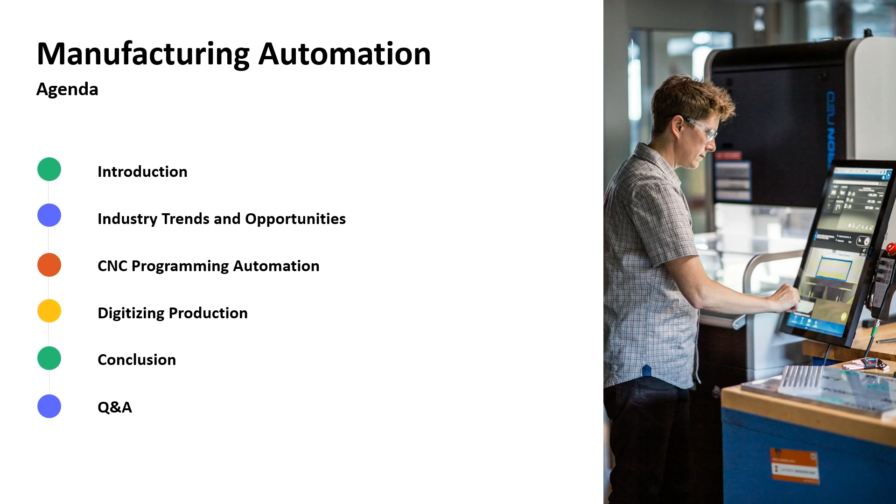So today, here's a quick run through. First I'm going to introduce Autodesk and go over some of the industry trends. I'll breeze through that part because it's a lot of repeat from what other companies have talked about in terms of trends they're seeing. Then I'm going to dive into two solutions. Autodesk has a portfolio of over 90 software solutions, not all of them design and manufacturing, but I'm going to talk about two today. One is called Autodesk Fusion, a design and make platform, and I'll specifically talk about some CNC programming automation. Then I'm going to talk about our MES system, which we touched on a little earlier with Bill's presentation, and talk about digitizing production. Finally, we'll do some Q&A.

A little bit about Autodesk, if you're not familiar. We're a technology company founded about 40 years ago. So who's heard of Autodesk? Great. Who's used Autodesk stuff? What have you used? Inventor, Fusion 360, Mechanical Desktop many years ago. Awesome. Anyone else? AutoCAD. Who's used AutoCAD? Raise your hand.

Basically everyone. So we still love AutoCAD, it's a huge part of who we are. We're also moving towards a new, cloud-connected platform business. So still supporting AutoCAD, still supporting Inventor, still supporting our flagship products across all our industries. But what I'm talking about today is really the direction we're putting a lot of our innovation into, which is a platform called Autodesk Fusion.

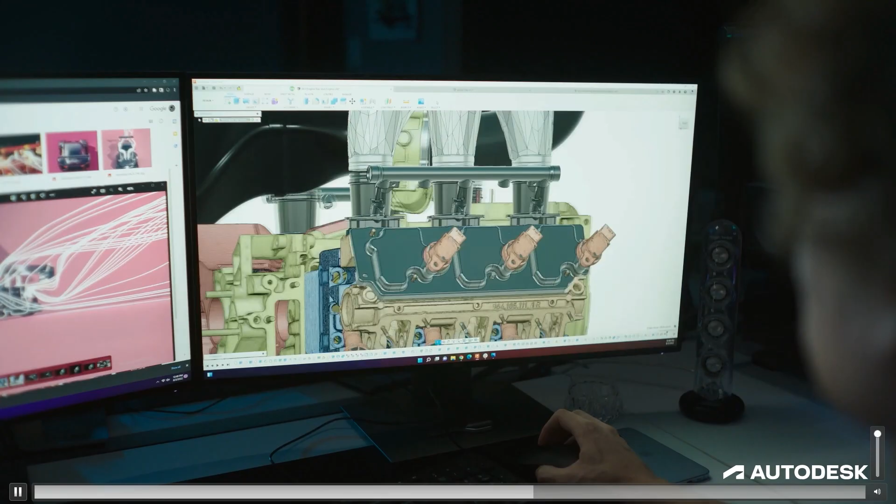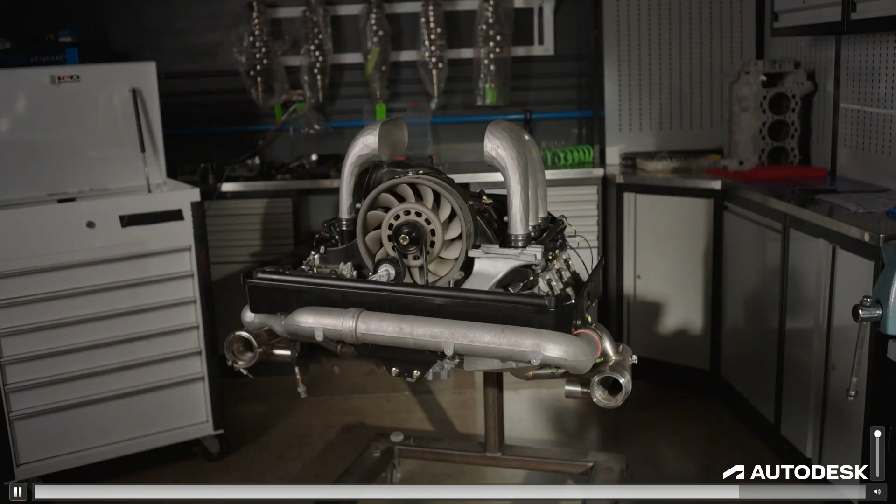So in a static market, incumbent suppliers are next to impossible to displace. If everything's going fine and you're just keeping the status quo, and a company has been using this product for years, they're not really going to change. You need a disruptor to change course, and many of your products might be that disruptor. So every now and then we experience a major event that changes the natural order of things, and those that can adapt the fastest become the new leaders. So we believe that right now is the time. It is an opportunity to reimagine possible and change to do things better.

So for manufacturers like BBI Racing, which was in this video, finding a way to control costs, maintain margins, manage supply chains, upskill people, and attract young talent means they're better positioned to win market share today and tomorrow. So when we say reimagine possible, we see this as the opportunity to take advantage of trends. One trend is smart products. This makes the machines around us more productive, and also creates opportunities as customer demand grows, product developers expand and supply chains onshore. One example of this is sensors that read off machines, sensor hardware that connects to robots or the FANUC controllers, this IoT system around our manufacturing floors.

Secondly, manufacturing processes are being increasingly digitized, which provides greater flexibility and efficiency in the tools that we're using. And third, cloud technologies are changing how we manage our supply chains and the manufacturing processes, helping deliver products on time, every time, right? This is where an MES system, ERP systems come into play.

Oh, I forgot to go around. Oops. Yep, I'm just gonna move a little faster here.

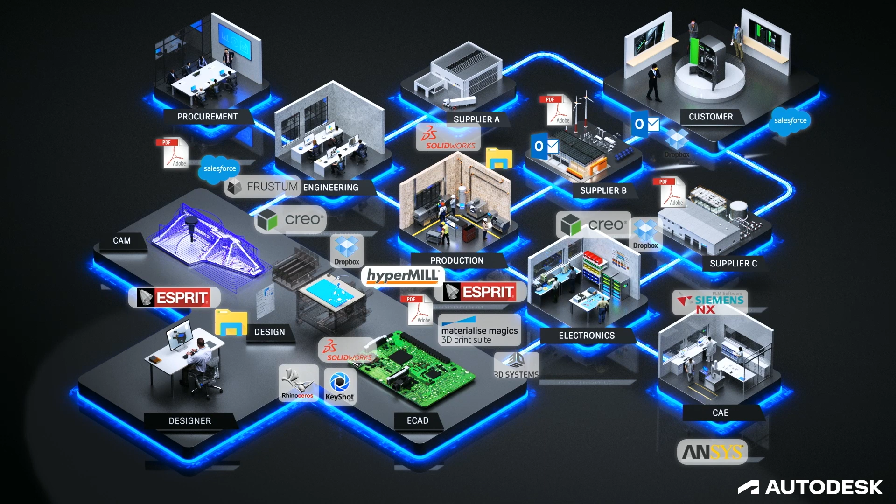So this is not to say we shouldn't all aim for tier 4 or whatever of digital maturity. We absolutely should. But we should be both realistic and practical in what we actually can achieve today, this year, in terms of increasing our business outcomes towards automation.

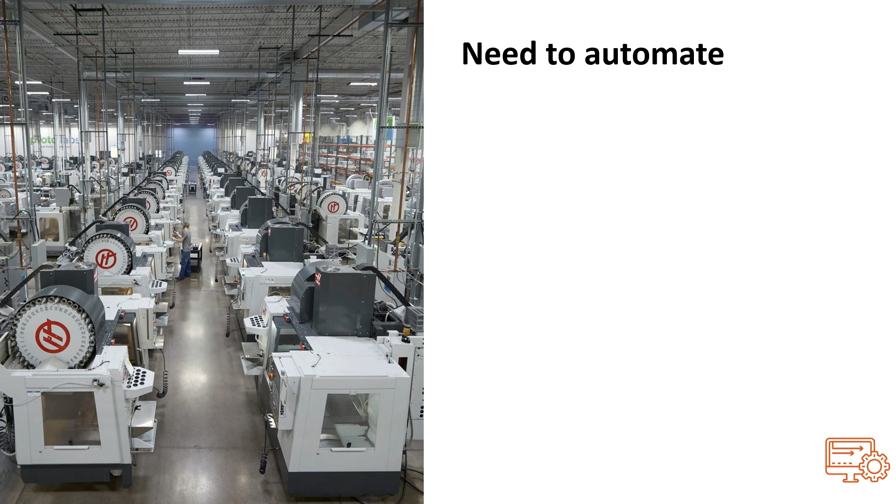So, as manufacturers, we need to address challenges and aspire to 4 key values. At Autodesk, we're really all about outcomes, right? Like, what are our customers getting? So we want them to create better products, win more business, improve operational efficiency, and enable increased innovation. And you all probably have your own unique challenges, right? No company is the same. But one commonality we see is the need to automate to speed up manufacturing processes and reduce delivery times. And that's why we're all here today.

Now, what do we mean by automated? When I'm talking about automated for this presentation, within the manufacturing industry, it comes in many forms, right? Assembly lines, industrial robots, we heard a lot about that today, to automated guided vehicles, right? But for this presentation, I'm focusing primarily on software. Autodesk does not build hardware products. And we're trying to help automate the processes for manufacturing. And the goal of that being reduce non-value added tasks, deliver repeatable and consistent workflows, improve quality, reduce human error, and result in more reliable products.

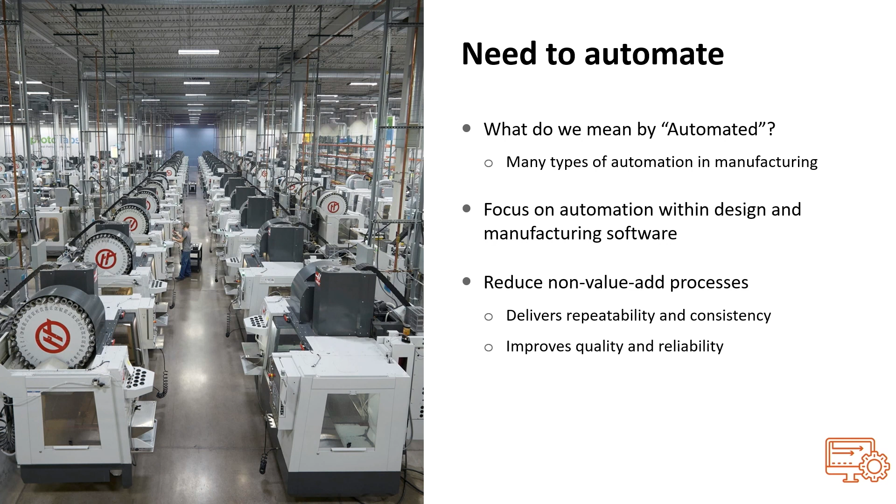So we're going to approach manufacturing from 3 levels. So first is the machine, right? Here we're talking about individual conveyors, gantries, mills, lathes, et cetera, on the shop floor. And we'll talk about automating setup, programming, and inspection tasks using a variety of machines. The second level is the operations of a factory or shop floor as a system, right? A system of people, a system of goods, all moving through space. And here we're concerned with increasing manufacturing throughput by optimizing processes around production management.

And the final, and that's this one. And the final level is supply chain. So securing the materials that you need for manufacturing without compromising quality. And here, this is part of an MES system, streamlining the management of inventory and suppliers.

All right, so let's start at the machine level. So in a recent survey by the Modern Machine Shop, more than 400 US-based manufacturing businesses were asked to review their achievements in 2022. So a number of interesting statistics stand out. First is 28 days. This is the average time taken to go from initial receipt of order to completing a project and delivering to the end customer.

80 minutes is the claimed average time spent setting up a machine in readiness for processing a new part. This includes fixturing, tooling, positioning, etc. 65%, this is a typical machine utilization across the year, meaning machines that are non-productive for 35% of the year, right? This is similar to some of the statistics.

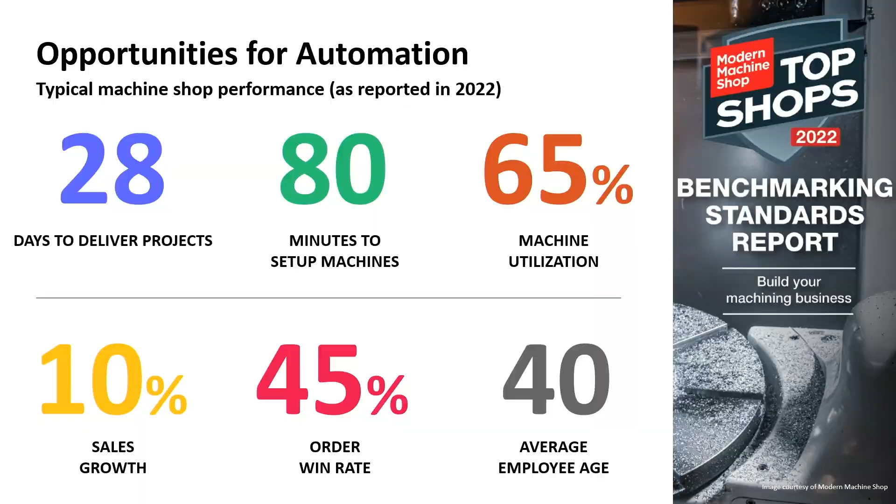That's incredible. That's survey data coming from that person. Yeah. When you actually measure that, it's even less, that's the 28%. Yeah, so as reported by people, they said it was 65% utilization. Clearly they were over-reporting. But interesting that they did over-report. That's some sort of psychological, maybe they didn't want to look as bad as it was.

10% is the typical business growth rate. Bigger would be better, right? 9% profit margin. 45% is the claimed typical order win rate. And 40 is the average age of employee in the manufacturing sector, with the average employee having 12 years of experience. It's interesting, there was a question much earlier about employees being sort of green recently, someone sitting back there.

And I was thinking about this number. 40 seemed lower than I thought it would be, to be honest. I'm curious, does anyone else have any reactions to that number or any numbers on this slide? Did you have something you wanted to say? No. I was a little surprised.

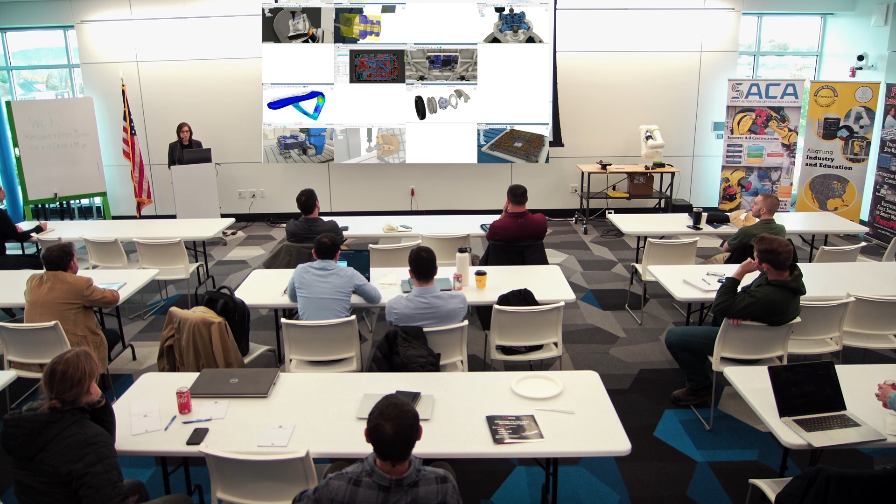So at this point, I want to introduce Fusion, which is our flagship cloud product for design and manufacturing. So it's not just a PLM system or PDM or MES or CAD or CAM. It doesn't just focus on milling or additive or fabrication. It's all of those things. It is packed with powerful tools to streamline product development and manufacturing, from initial product design to simulation to documentation. It provides a comprehensive toolkit for every piece of a product development cycle.

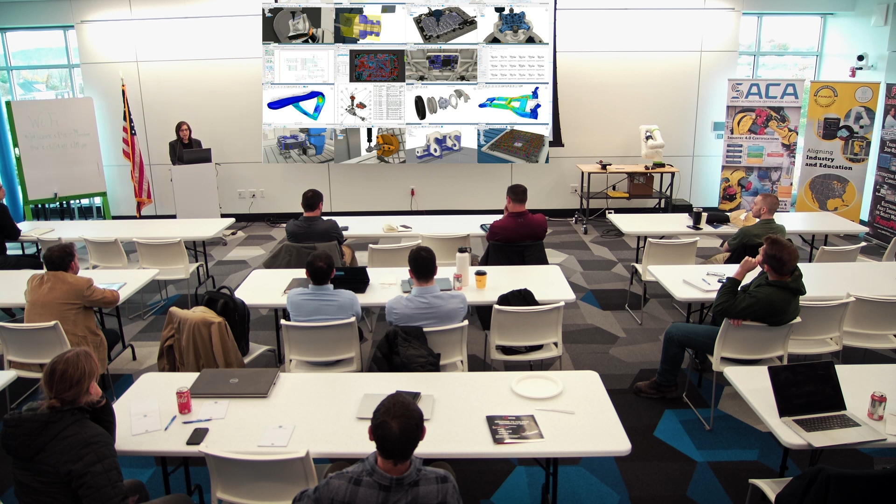And the part we're going to focus on today is the NC code generation and some of the automation tools around part manufacturing. So, I'm going to walk through some examples of some of the individual features. It's a little bit more technical, but I think there were some other technical things, so I think this is a good audience for some technical demos and features around it.

So I'm going to give 4 or so. These mostly are focused on CNC machining, which I think some folks in the room do, but we also have not shown a lot of features around, for example, nesting and fabrication for sheet metal and things like that, and also injection molding simulation. So not what I'm going to show today, but they're there. So the first is automating setup time. So on that slide I showed, 80 minutes was the reported average setup time for a part.

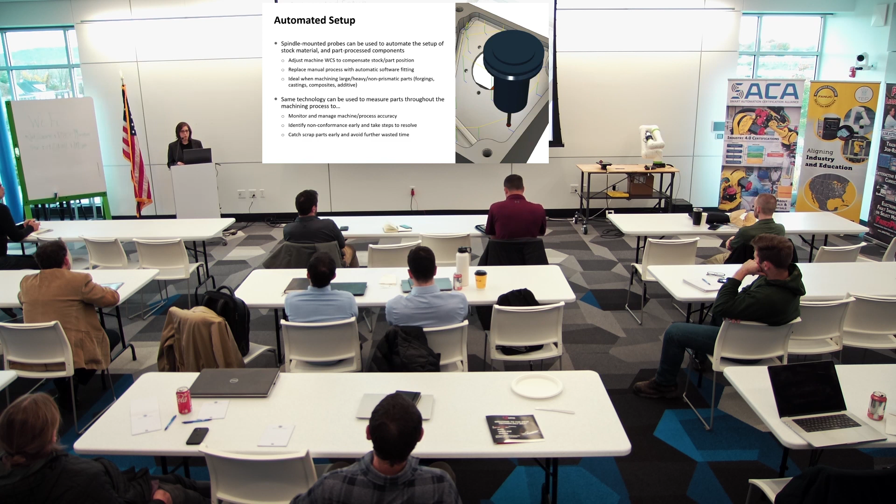So starting with setup, Fusion can automate this piece. So it includes workpiece coordinate system probing using spindle-mounted probes, and we can add surface inspection and part alignment capabilities to monitor the quality and performance of the entire CNC machining process. So basically, you can probe your part before you start, entirely automated, and then you can add probing cycles in the middle of your CNC program so that you're actually checking and monitoring the part before it's done.

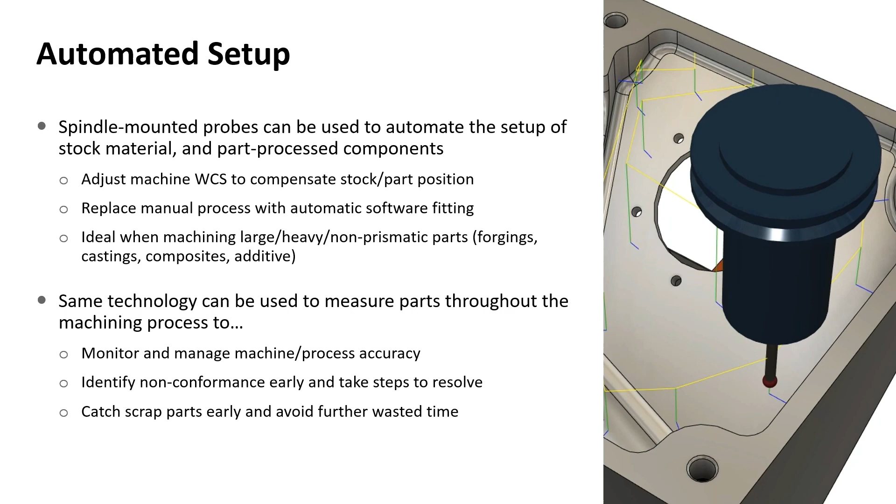So, for example, if you do it after the first operation or the second operation and it's very much out of alignment, maybe your fixture wasn't tight or something, you can realize that, scrap the part before you get 2 hours into the machining time. So all of that can be programmed. And here is a little video.

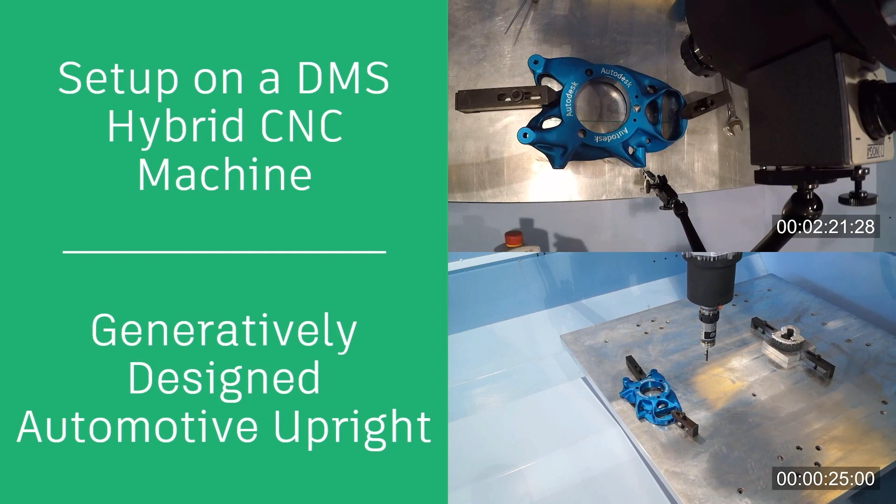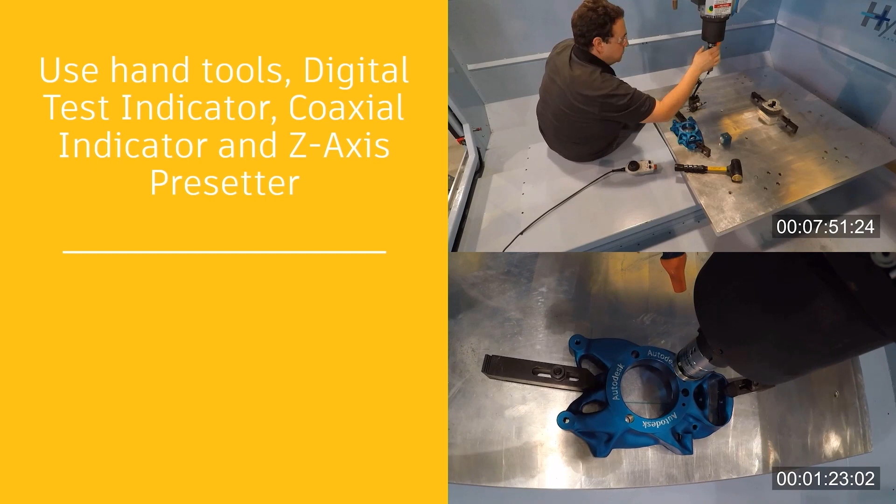So here we have a comparison between manual and automated sequences on the same part. So in the top video, you can see the time is actually moving a lot faster. But in both cases, it's the same part on the same machine. And by programming the setups offline and running them as quick, repeatable, and accurate NC programs, you can maximize profitability. You can use that time for other value-added tasks. And you're getting more accurate probing.

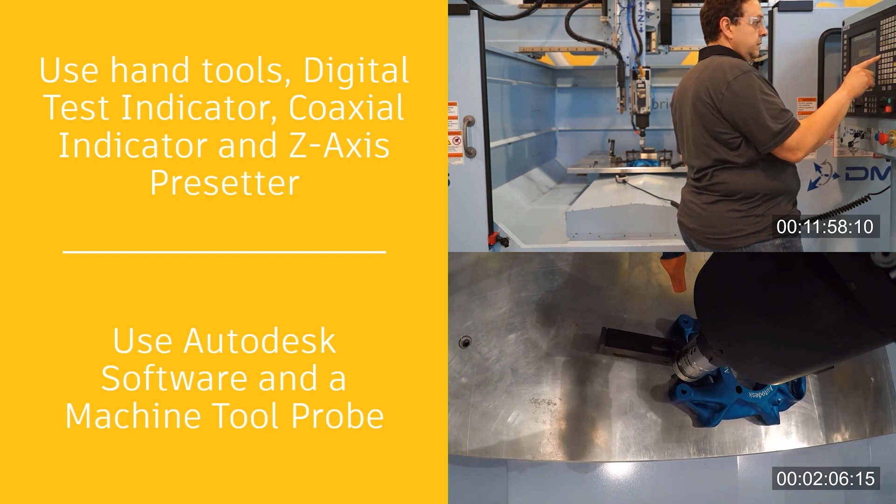So the automated setup took 2 minutes and 6 seconds, and the hand programming setup, and this video was done with an experienced CNC machinist, still took him 12 minutes.

So this is a pretty awesome feature I've actually used myself to program parts when I was an engineer. And this is using templates. So I'm going to see if this video will cover it. But the idea here is that you can create a template. You're basically doing similar operations for similar parts, right?

For this turning part, you're going to run some roughing operations, some finishing operations, some grooving operations. And that's a pretty templatized set of operations already. So you just create that list of operations in a file, right? And then you drop your part into that file. It finds the part, and it applies all those toolpaths to this part.

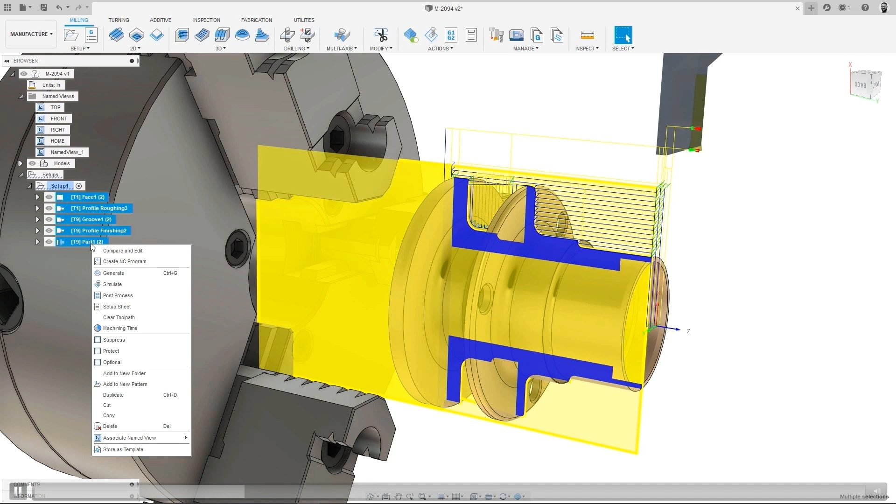And if you want to do it to a second part, you just drop that part in, and it does the same thing. It applies all of it. So what that allows you to do is not add the same toolpaths over and over again as you program multiple parts. It's just literally a drag and drop, and it automatically figures out what it's doing. And it does that by figuring out what to cut by subtracting the part from the stock. So it's totally automated. And it's very repeatable. It makes for more consistent parts.

It means you can get new employees up to speed doing more complex parts faster, right? If you have new programmers coming in and they're getting up to speed on the software, they're getting up to speed on what toolpaths to use. Here you have an experienced person creating a template for a part like this. They drop it in, and they can start cutting much faster.

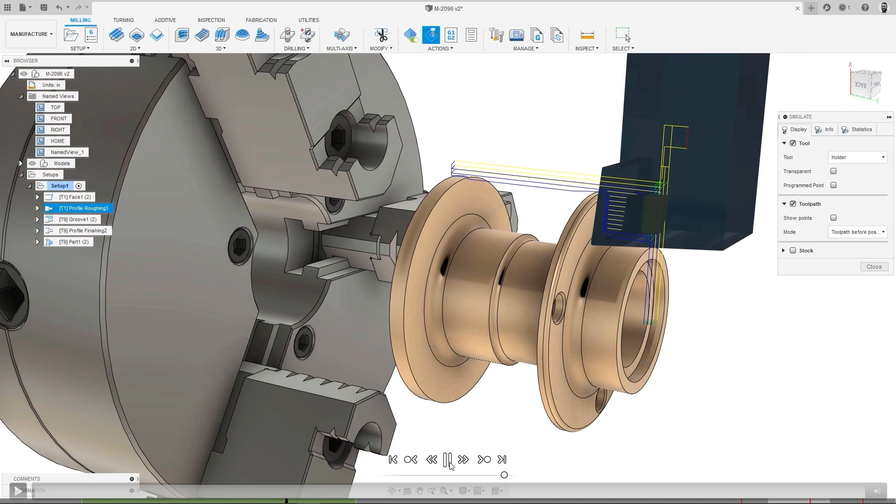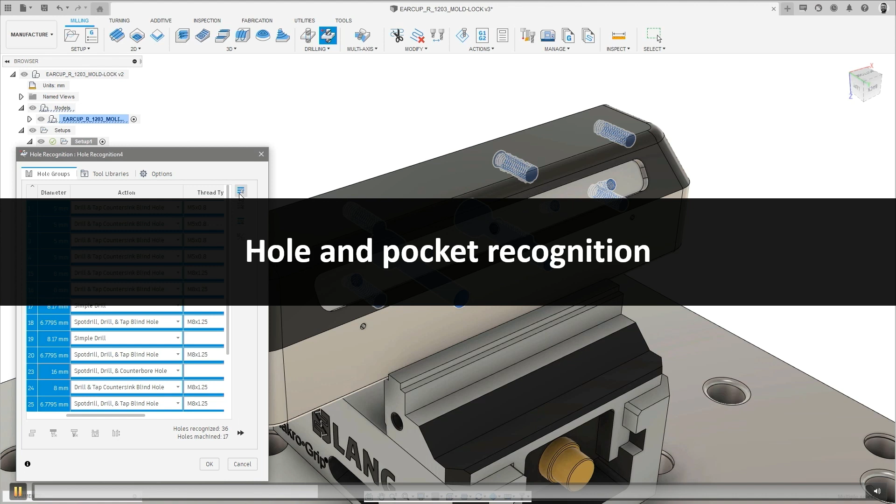The second one is around hole and pocket recognition. So when I was an engineer and I was prototyping on CNC machines, this is something that is pretty ubiquitous. I did it a lot. And every time you have to click on the holes and size the drill. So this automated tool, basically, you select the part, it finds all the holes in the part, and it finds exactly the sizes. It suggests tools for you to use for those holes, and it will do it.

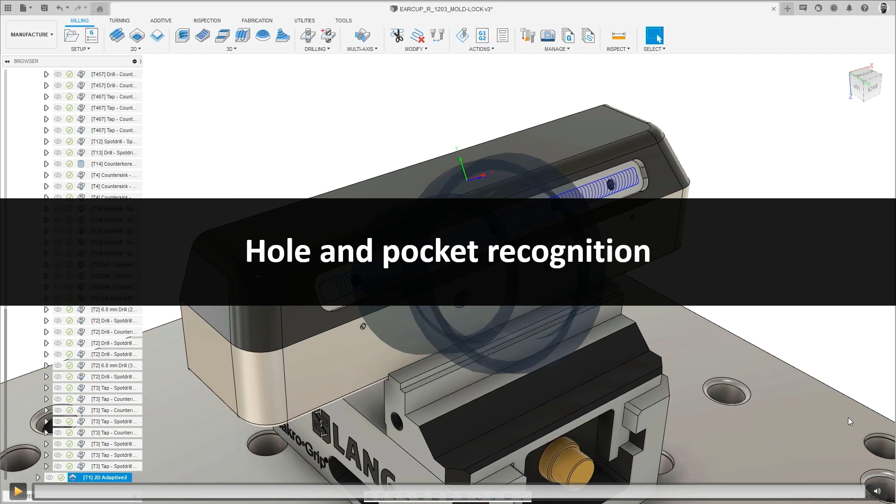You'll basically select a face that's normal to the vertical axis. It's going to find all the holes on that surface. So this works for models imported from other CAD systems. It recognizes holes using predefined configurable templates. So once it recognizes all the holes, you can say, okay, do you want to use a template?

And let's say you have a template for reaming, or for spot drilling, or for tapping, right? You just say, okay, I'm going to use this tapping template, and it will apply that to all the holes or some portion of the holes. So it really reduces what was a quite manual process into a couple clicks.

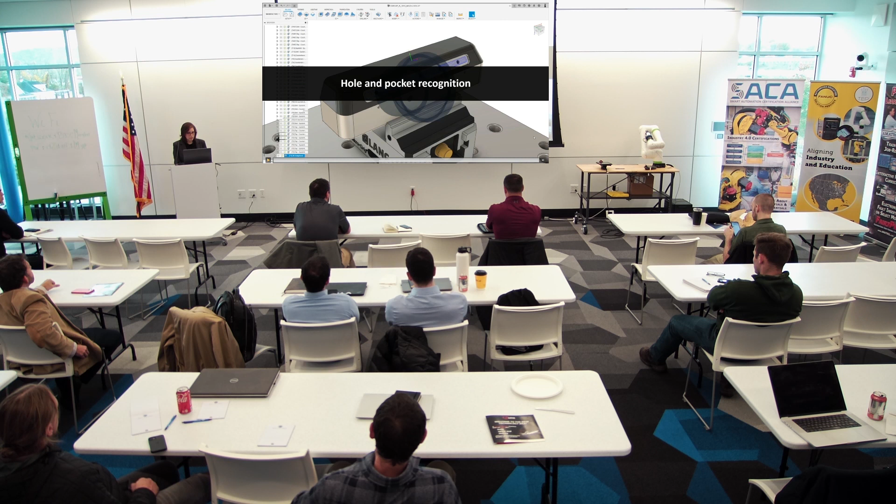Did I play that? I think I did.

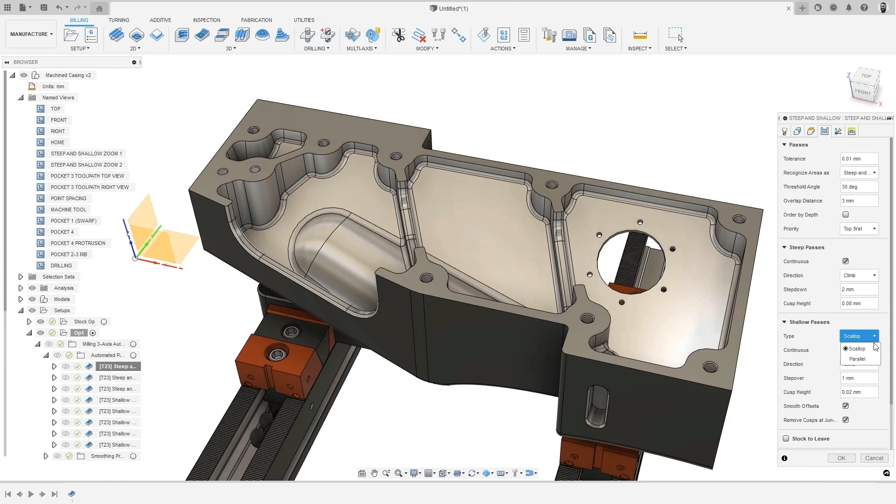Yeah. So then we have automated whole part machining. So I talked a little bit about this, but this is a huge benefit. I wish I had known about this when I was machining parts. So we have a lot of strategies in this category, but basically they eliminate the need to select edges, faces, features, etc. to machine. You just select the part, and it calculates what to cut. There's roughing strategies for this. There's finishing strategies for this.

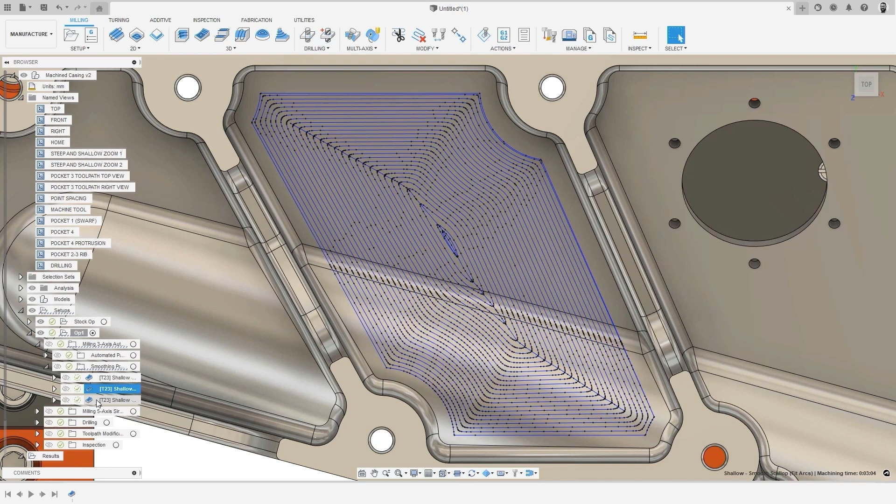Probably the most automated one is this toolpath called Steep and Shallow, and it works for shallow pockets or shallow surfaces and really deep surfaces, or steep surfaces. So typically you'd have different toolpaths for milling flats versus milling the edges of pockets. And this allows you to use one toolpath for all of it. You just basically have a threshold of like, above a 30 degree angle, you use this toolpath. Below, you use this toolpath, and it's still one toolpath, but it's pulling in the code from these other strategies all into one. It's pretty awesome.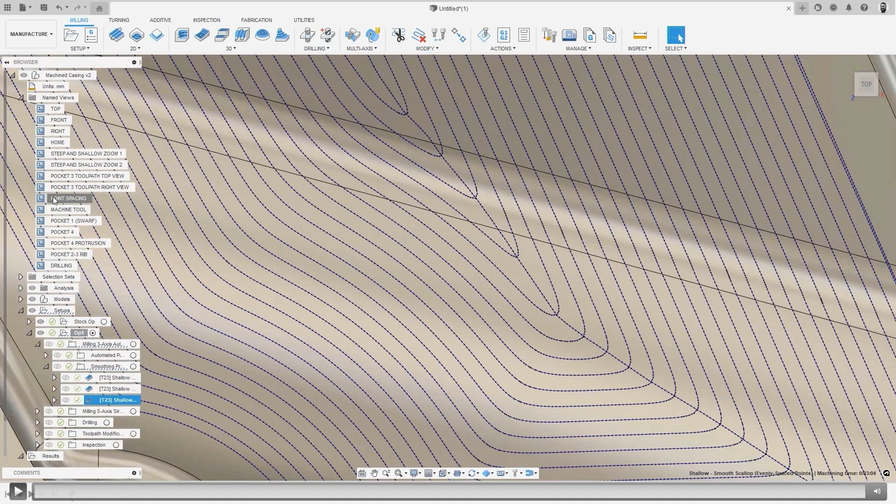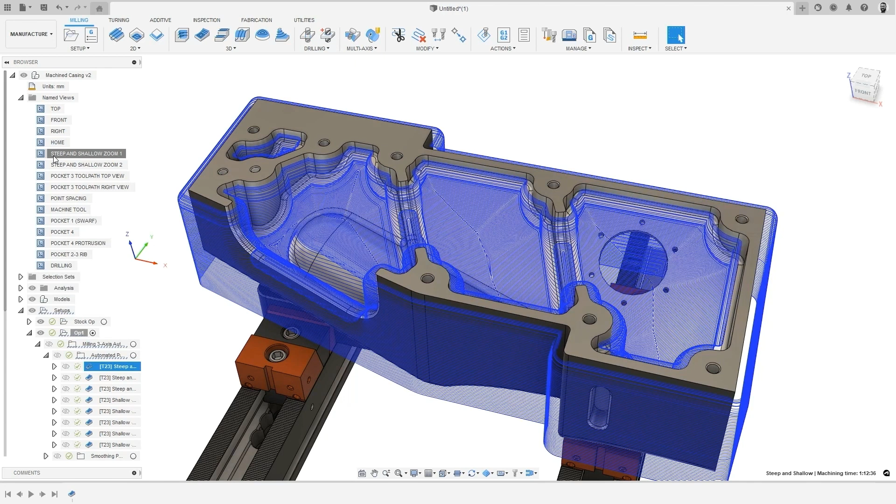With a few tweaks, you're basically having the machining and the programming done in a fraction of the time it would take. And then the last thing is collision avoidance. So this is probably most useful for multi-axis machines, but still fairly useful if you have complex fixtures, or you're thinking about hitting the limits of your table of the machine.

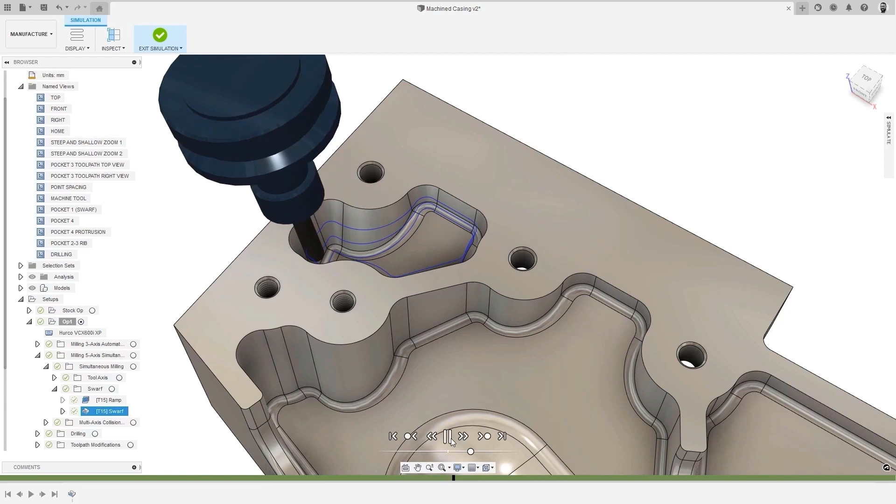So it can program simultaneous multi-axis operations. You can put the machine in and have it detect collision and figure out how to tilt the part, not just to optimize the toolpath, but also to eliminate those collisions. So pretty sweet. This has been a big area of focus for us, not just building world-class CAM software, but building in these automations so that we can have the best toolpaths done much quicker.

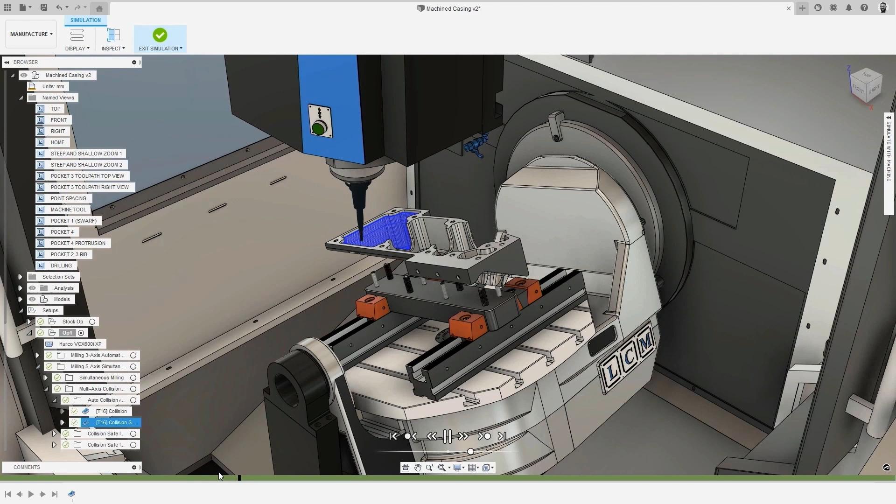And all these features work on a platform that is designed to have design and manufacturing converge. We use a single manufacturing data model. So anytime you're making a change, that's available to all stakeholders instantly. For folks who've used Fusion, it's a cloud-based platform. So if I change a toolpath and then I save it, it automatically saves. It'll be available to folks viewing that code instantly.

So it's super quick. If you're going from programmers to operators, that's almost an instantaneous connection. They can leave comments on the file. They can suggest edits. You can have multiple viewing levels, so you can have read only, and store things on a common platform. It's pretty powerful. So now that we've covered that, any questions about automated programming?

Okay. I haven't heard you say CAM. Yeah, I haven't heard you use the word. Oh, I used it when I was introducing Fusion, I think. But yeah, it's CAM. I'm not avoiding CAM. Okay.

So I'm going to move on to talk about digitization at the factory floor and supply chain levels. I'm going to cover mostly digitization of the factory floor. Supply chain is a small piece of it that I'll talk about at the end. So there's no doubt that managing a manufacturing or production facility is difficult, right? Balancing production and profitability goals with customer expectations is challenging. And we find that our customers are constantly faced with obstacles that can impede their path to being successful.

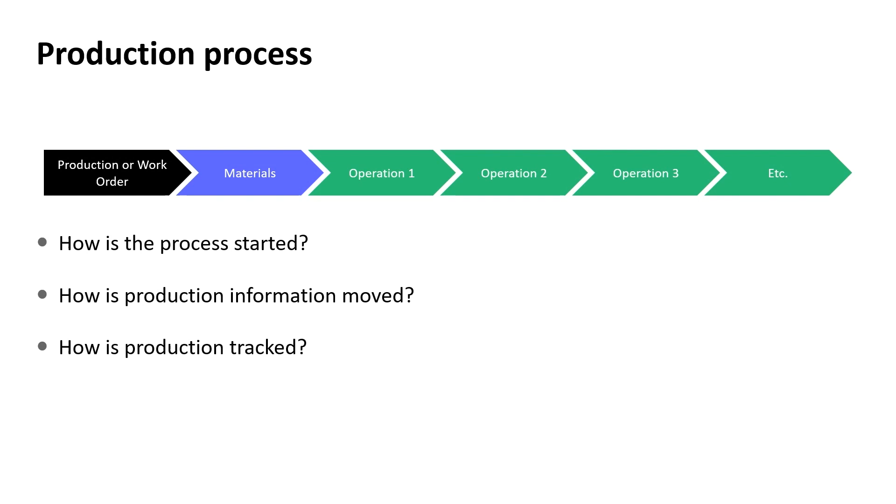And the typical production workflow looks like this. The most common way of managing information on any production floor is typically the paper traveler. You receive a client order, data is input in Excel: the order code, the products produced, how many, when they are due. This document is then printed out, given to a supervisor to start production. It follows the production flow along with the manufacturing materials. Each operation is recorded by operators on the shop floor and then returned to the back office team for manual data entry once that step is completed. We see this all the time.

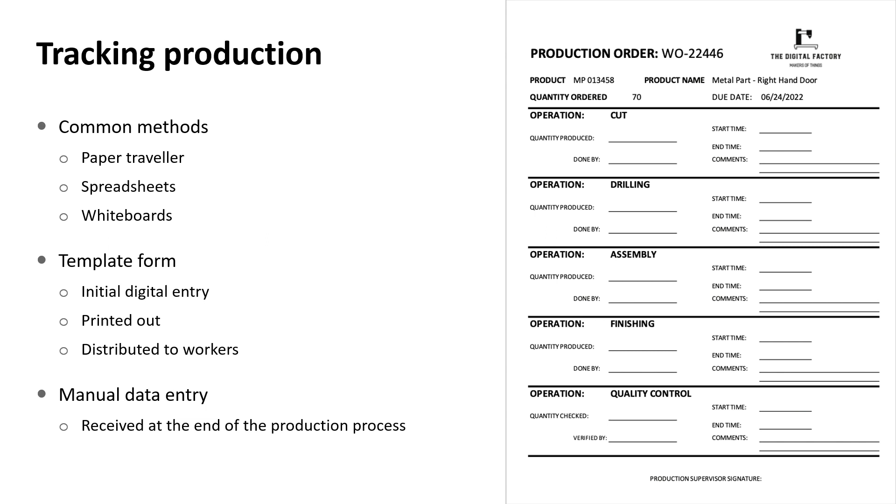So going back to our workflow, we can see that the paper traveler moves the production information along with each stage. Sometimes it's literally on the order, under the order. So as it travels, information is written down, timestamps are recorded, it tells us when each stage is complete. And then when the whole job is completed, the package is returned with the production information filled out, ready for manual data entry.

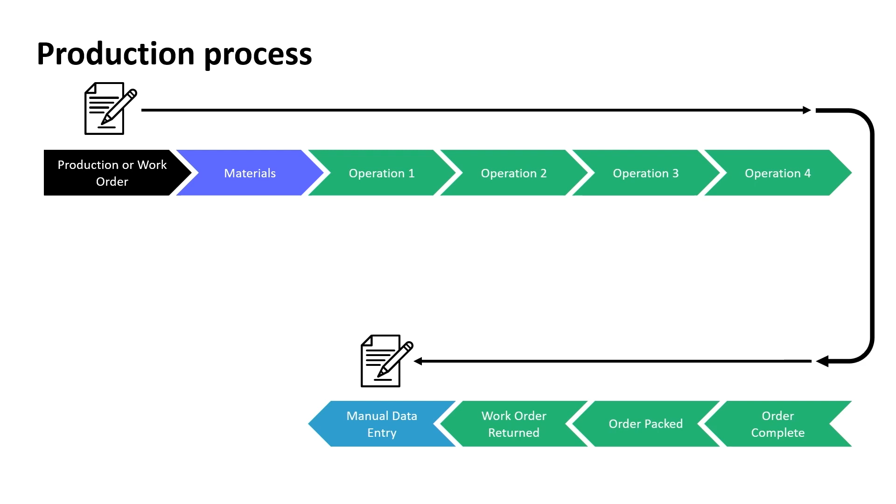There are several issues with this, right? We know that. First of all, you're relying on a person to manage the initiation of this process. You can't just say, okay, work orders in the system, start.

There's this whole printing, figuring out, making sure all the numbers are right in the sheet, then relying on that person to go physically take it down to the shop floor, which for small businesses might be literally right outside the office, but for larger businesses might be a different location entirely. Might be down the road. Maybe those people are connected, maybe they're not. Maybe they need to email it.

Things get lost, right? So operators, and the other issue is that operators are inconsistent with how they record their work. Data can be difficult to read. Things can be spilled on it, like just simple stuff like that.

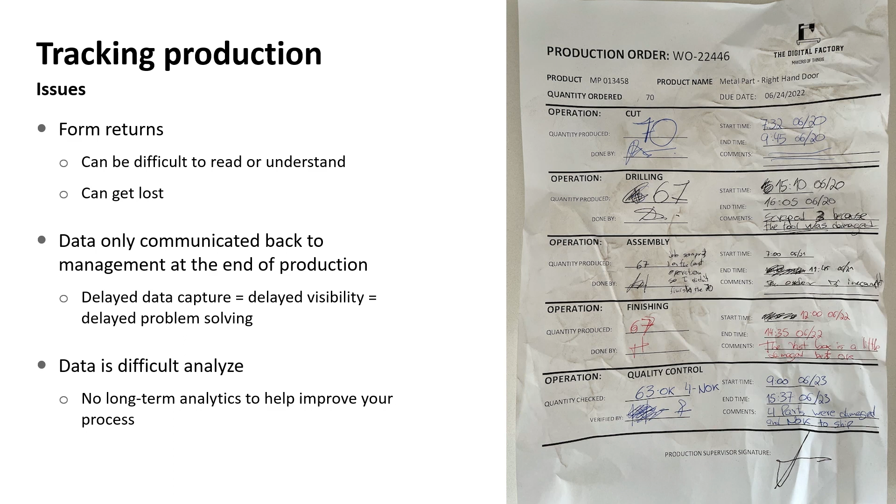And in real time, the production manager will need to physically traverse the shop floor to understand their status. Our customers will get a call, hey, what's the status on my order that I put in 3 weeks ago? And the person answering might say, I don't know, I have to check with our production manager. They have to go track them down. They have to go find the sheet. They have to go find out who's working on it at that time, right?

No real-time visibility. This can be challenging if you want to look at how has our performance been the last 2 weeks? How's our throughput been? How many jobs have we completed?

And even if the traveler is filled out perfectly, we still have lots of missing information, right? Things like inventory, operational availability, uptime, downtime, supply chain management, quality management.

So at the very beginning, we might have the right material in stock, but maybe we made some errors in the machining process, and now we're out of stock. Where is that being recorded? How is that being connected to the production process, for example?

And what about operational availability? What are the machines currently doing? Are they down? Do we know why they're down? Are they running at capacity?

What about the workers, right? A huge piece of this is the workers. Are they available? Are they working on their jobs? So one person asked the question earlier about how do we track worker productivity? Like, how do we know which of our employees are working at 110% of their expected capacity and which ones aren't?

That's also important. You want to make sure that if you have workers that are struggling and they might not self-report it, you want to be able to say, okay, maybe you need help with this, maybe this is an opportunity for upskilling, et cetera. Being able to identify those gaps is pretty important to retaining workforce and retaining skilled workforce.

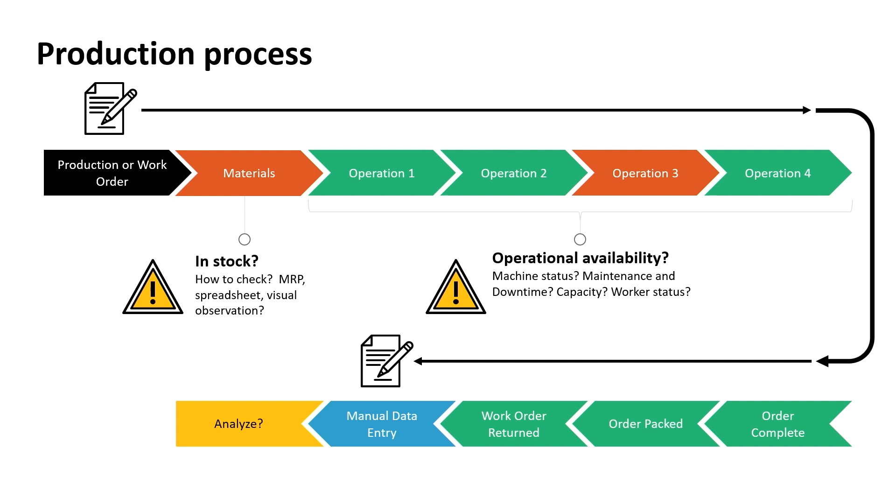If this doesn't get done, maybe there's accountability for it, maybe there's not, but if it doesn't get done, there's no data on it. And even if it does get done, there's an opportunity cost in the timeliness of it, right? We need to know what's happening on the production floor in real time. So using traditional methods, when information is required mid-process, someone has to find the person.

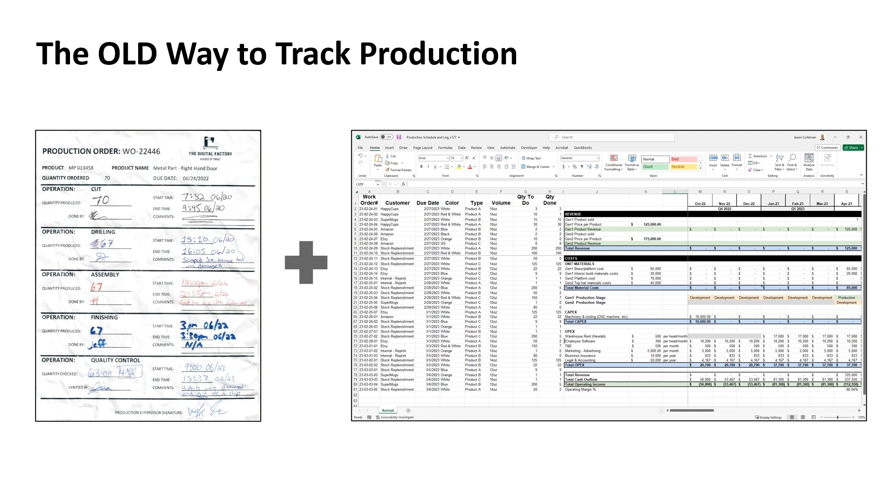But there is another way of tracking production, right? We've seen this a little bit, which is Excel, or less frequently Airtable, or just homegrown table-based systems. This is digitized, I guess, in the purest definition, but it lives in isolation. It's unstructured. It maybe was built by someone 20 years ago, and it doesn't really offer a lot of intelligence or visibility. It's just a recording device, basically.

We found that, of course, there's paper, there's spreadsheets, there's whiteboard systems to track their processing. These all have high costs. They don't provide information, they don't enable manufacturers to be on top of their processes, and they don't do a good job of achieving business outcomes at all. Deadlines are missed, increased waste and scrap, reduced quality.

So there's a better way, and one of our products, which is called ProdSmart, which is an MES system - I'll go into detail about what that actually means - primarily aims at digitizing production processes, giving key analytics and intelligence to make better business decisions.

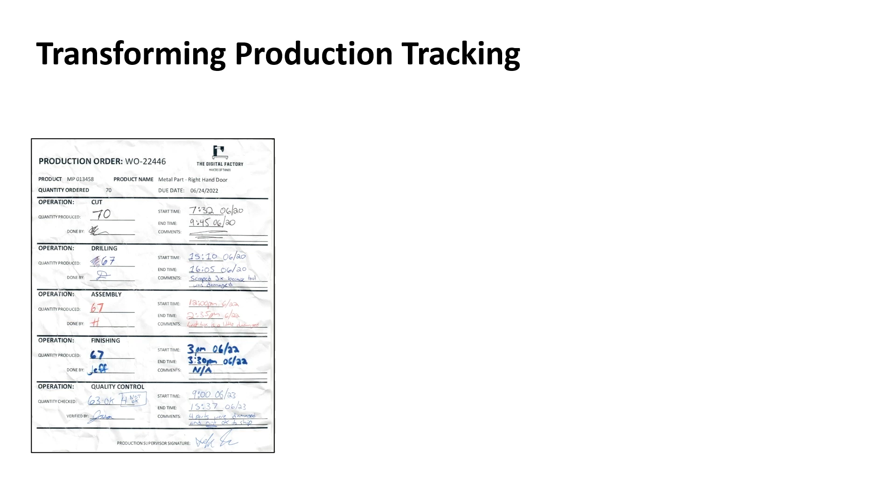So one differentiating feature of ProdSmart compared to MachineMetrics is that we don't currently have connectivity to the machines themselves. All of this is worker initiated. It's not recorded by typing, it's all a system of scans.

The way this works is it's an app. It's cloud-based, similar, but it's more focused on the worker and the user versus the machine. So, of course, we track machine uptime and downtime, and that's based on scanning in and out. A worker gets to a station, they scan in, then when they're done, they scan out, and we take all that data, and that's how we calculate uptime and downtime. It also gives us really detailed analytics on each worker themselves. So the basis of the platform is the users. That's a pretty big difference.

I'll talk about the benefits of this system and some more stuff after, but first I'm just going to walk through the capabilities.

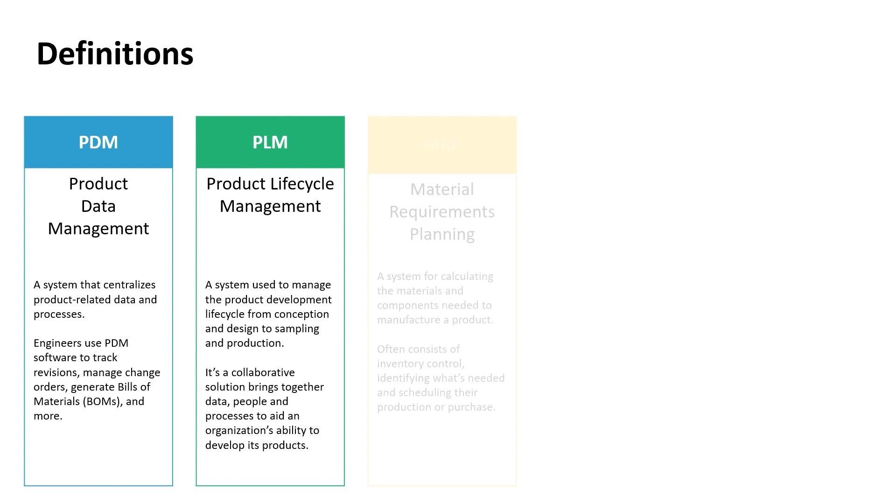So the definitions are, and hopefully this is helpful in this broader conversation: we talk about PDM, PLM, MRP, ERP, and MES. PDM is product data management, and that's a system that centralizes product-related data and processes. It's really for engineers to track revisions, manage change orders, generate bills of material, and more.

Oops, I forgot to do the last one. It's mainly on the design side, although I have seen some customers use PDM systems for some of the facilities management stuff, like keeping track of drawings, building plans, machine data sheets and things like that. PLM is product lifecycle management.

This is a system used to manage the product lifecycle from conception to sampling to production. It's a collaborative solution that brings together data, people, processes, all to aid an organization's ability to develop products. So think of it: if PDM is just around the data management or the file management, PLM is around all of the process management that surrounds the data management.

So, okay, you have a change order. What is the flow for that change order? Who does it go to? Who approves it? All of that is captured within the PLM system, plus more. MRP is material requirements planning, a system for calculating the materials and components needed. It often consists of inventory control, scheduling production, purchase orders, etc.

ERP is a very big one. It stands for Enterprise Resource Planning, and these are typically huge, expensive systems. They're very comprehensive, and I'll show what they typically include. But they consolidate all aspects of a business, including customer relationship management, or CRM - so, for example, Salesforce is CRM - purchasing and accounts, human resources, material requirements planning, supply chain management, and a lot more.

And last but not least, there's MES, Manufacturing Execution System. This monitors, tracks, and documents and controls the process of manufacturing goods from raw materials to finished products, and uses data to provide information on production. So it's really specific, typically, to production.

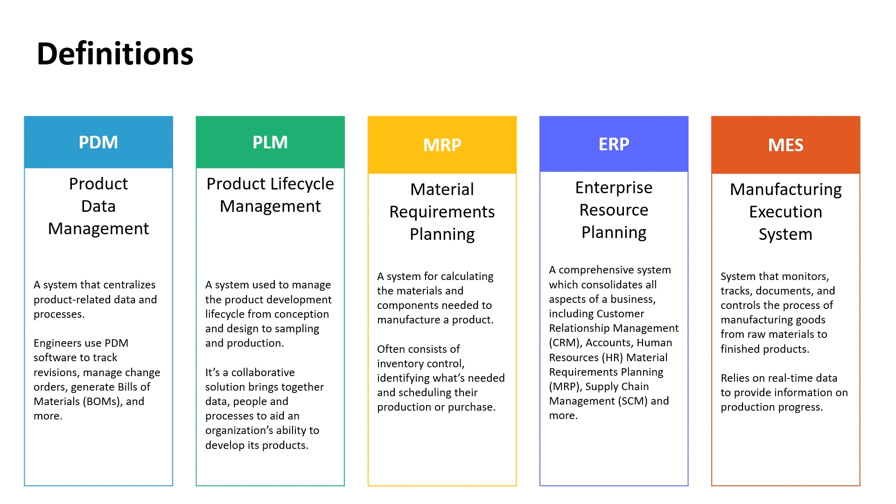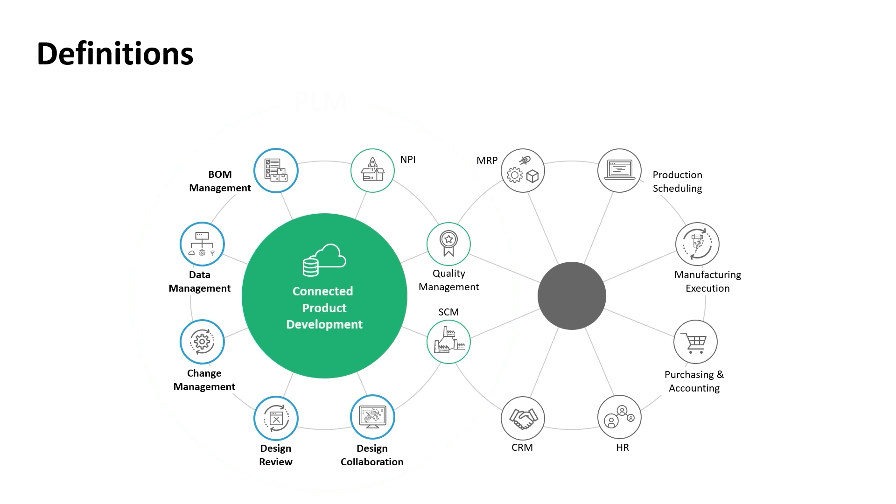So this is what it looks like visualized. Going back to the elements diagram, this left side is really on the design side. So we see things like data management, BOM management, NPI which is new product introduction, design collaboration, design review - this is all PLM. PDM is a small portion of those; PDM would include things like design collaboration, design review, BOM. But PLM is really the system around it that involves all of those processes together, and that's on the design side.

And then we see on the manufacturing side, we have MRP - that's just one piece that I talked about. And then it could also include elements such as production scheduling and material purchasing, and all of that is typically within an ERP. So ERPs are huge.

They typically are not great solutions for very small businesses because they're expensive, and they consolidate a lot of things that in a small business might only be one person doing it. It's not like a whole department or anything.

But what MES systems do is take a piece of ERP that's really only around production, and they do it well, focusing on that production piece. The primary functions are to manage manufacturing execution, production scheduling, manage materials, and monitor quality. So this is where we'll focus for our solution, although we do have a comprehensive solution for PLM and PDM, which is on the other side of the diagram.

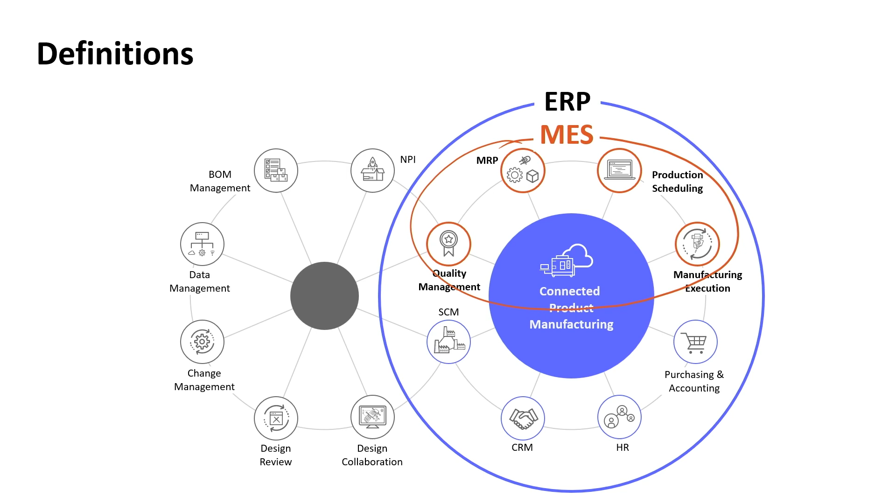When it comes to manufacturing software solutions, all of those different acronyms become an alphabet soup very quickly. Those are used to digitize paper. They tend to work better for larger organizations, built for companies with large budgets and dedicated IT staffs and integrators to figure out how all the systems work together. If you have an ERP system, for example, you need to put a bunch of stuff in one bucket — you might have a CRM, a change management system, an HR system — and for that to all integrate together is quite a big task. Typically, it doesn't get you a lot of immediate benefit, and it takes a long time to implement.

And even MES systems or solutions that are pieces of that, if they're built for larger organizations, they can take a lot of time, and of course they're quite expensive. But we see from our research that it takes 6 to 18 months to implement a typical enterprise-level MES solution.

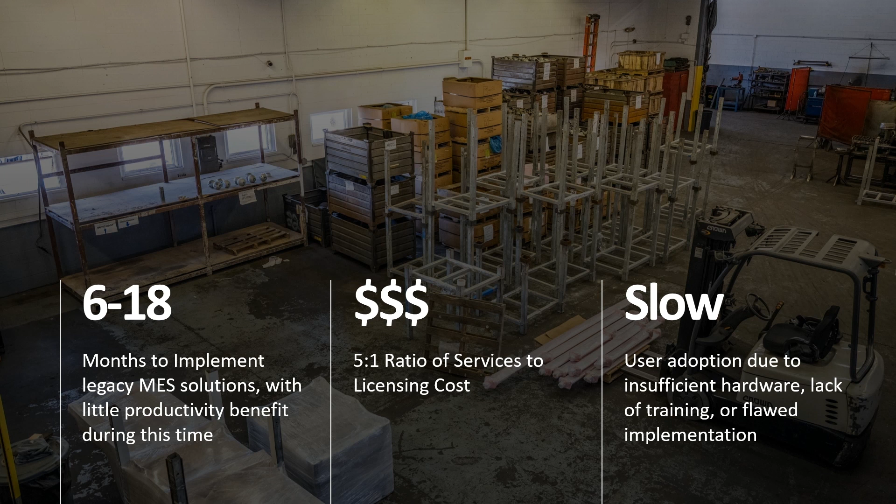So with ProdSmart, what we're seeing and hearing from our customers who adopt is that it's really fast — they can get up to speed in a matter of weeks. We've seen 2 weeks from purchase to full implementation. We're also pretty affordable — it's a scaled pricing model based on the number of users, but for our mid-tier size, it's less than $1,000 per user.

And it's efficient — easy adoption by management. You get dashboards, you get data analytics instantly with a modern digital interface and device independence that goes on an app. So I'll play this quick video.

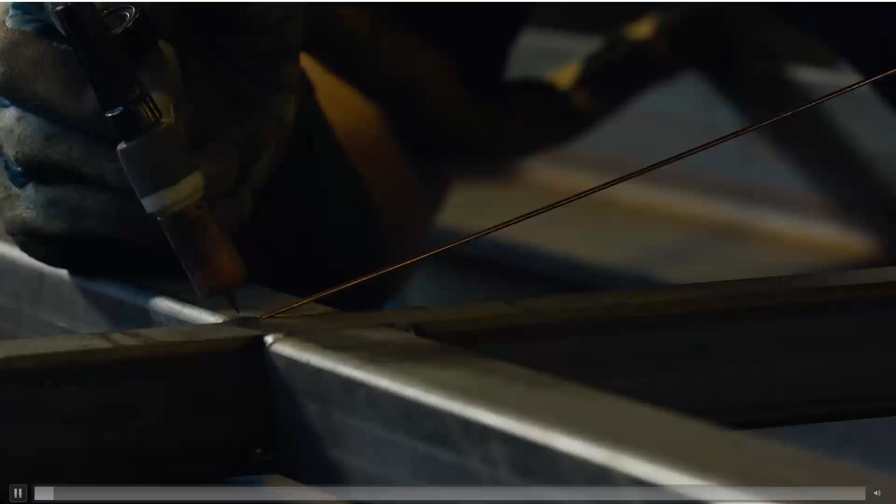Operating a production facility can be complicated, with a constant need to monitor everything from raw materials through to finished goods. To help address the challenges, production managers look to manufacturing execution systems, or MES, to track their production processes. But often these can be expensive to set up, painful to integrate, and under-deliver on addressing their true needs.

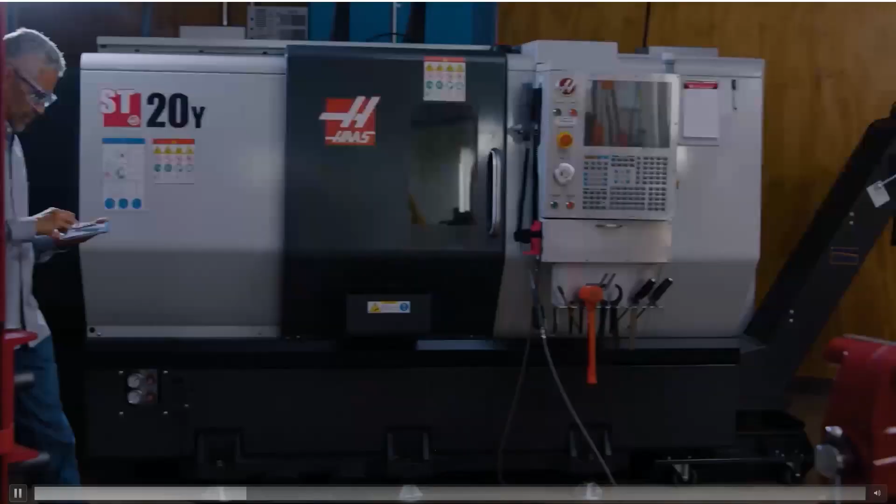Autodesk ProdSmart is different. ProdSmart is a go-anywhere, use-anywhere, cloud-connected MES and light enterprise resource planning system, which capitalizes on the use of web browsers and mobile devices for operation. This minimizes the IT overhead needed to get you up and running sooner and gives you the flexibility to start managing your production data today and adapt to your business as it grows.

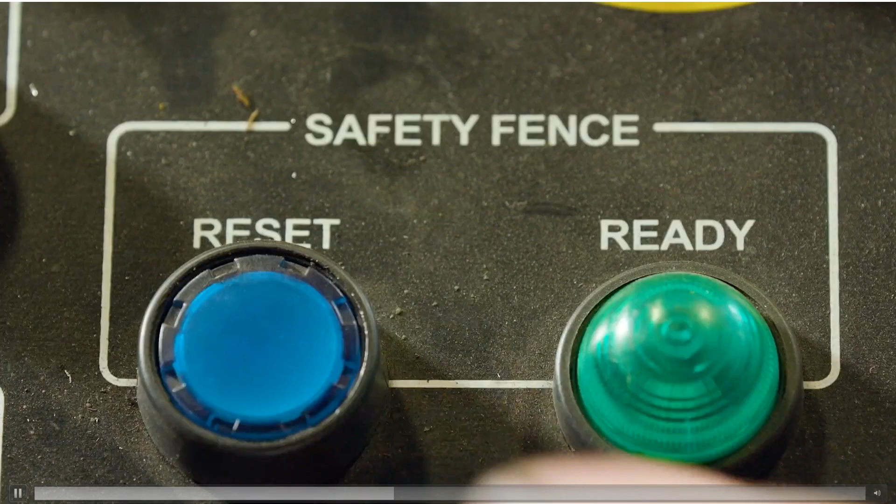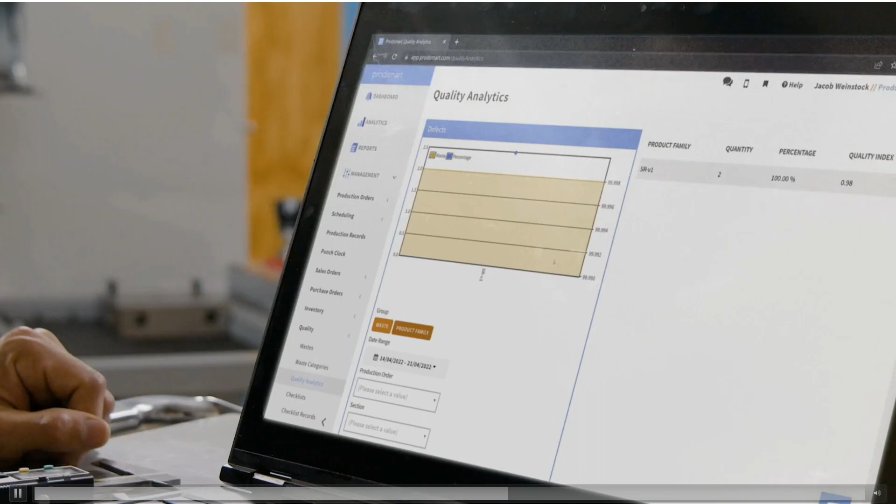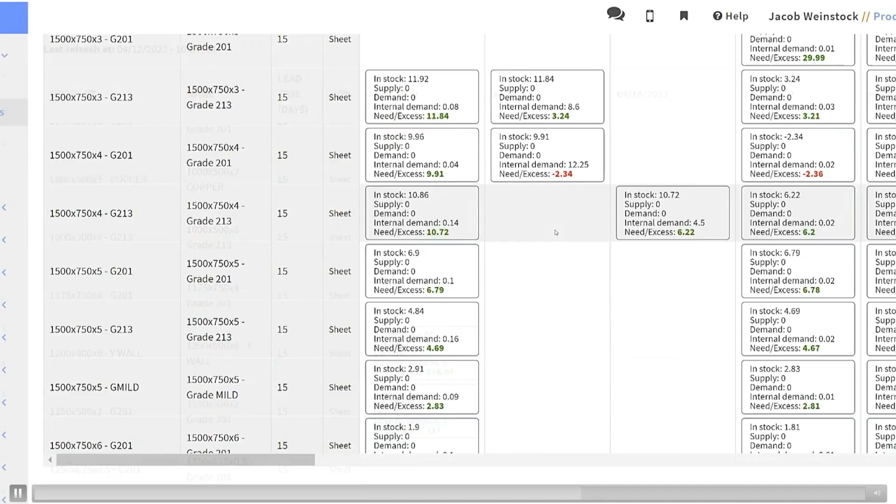Focus on what's important, like monitoring your operations through production tracking dashboards and audit-ready quality compliance reports fed by real-time information collected from the shop floor, making it easy to visualize your production efficiency all the way from orders to shipping. Manage your teams, machines, and materials to optimize your production capacity and increase manufacturing throughput with material and resource planning, helping to minimize waste and reduce the environmental impact of your business.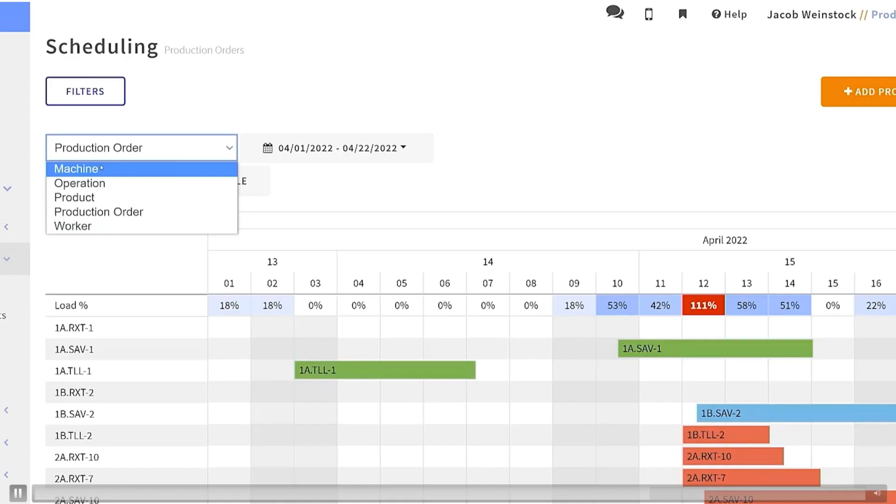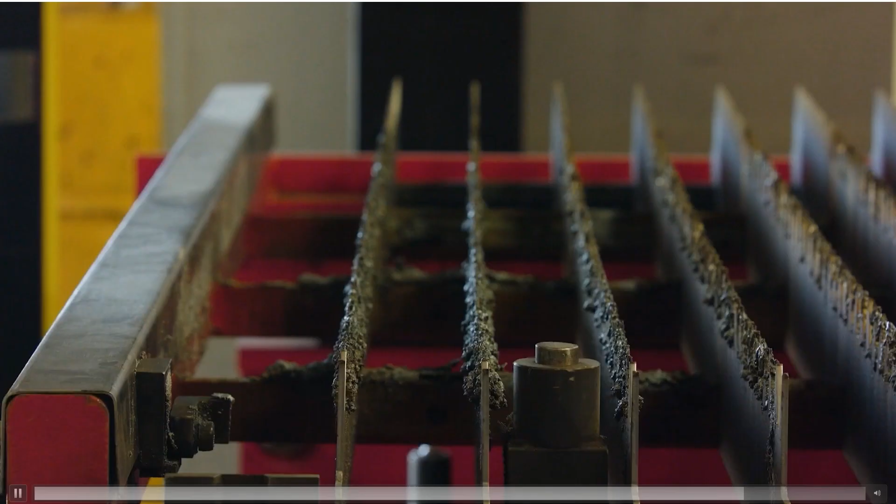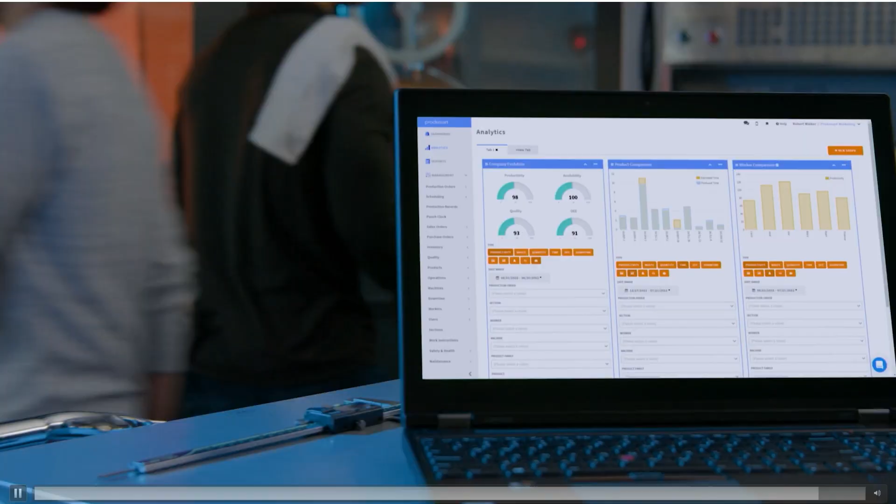With scheduling for preventive or corrective machine maintenance to reduce production downtime, and integration with upstream or downstream resource planning, customer relationships, and product lifecycle management systems to keep your data synchronized and prevent duplication. So, whether you need to improve your production workflow and execution, cope with change and quality management, or get visibility on throughput and machine maintenance, get your business future ready with Autodesk ProdSmart.

So ProdSmart, in its simplest definition, transforms floor production into a digitized process. The main objective is operational efficiency. So we want to help manufacturers and fabricators and empower them to go paperless by digitizing and automating their operations. So we help schedule, track, trace production and quality processes in real time with data and capture data on the shop floor. So it's a cloud-based modular tool.

It's super flexible and it has really quick implementation time. There's also instant data capture available on the dashboard as soon as it is input via scan. And the scan is all done on standard devices, tablets, smartphones, etc., as well as barcode and QR readers. It does not currently do machine monitoring or machine level analytics, but it does have the ability to aggregate different data sources and feed those into the system.

And there's multiple benefits, right? So the ability to increase manufacturing flexibility, getting necessary information to plan ahead for the next production run, how to improve supply chain agility, minimize production waste, with no complexity, no IT team required, no extensive hardware needed. We don't have to come to your facility to help you set up things. As is, it can be implemented. You just go to your browser or mobile phone, sign up, install the mobile app, and you can start obtaining results and data. Digitization, data-driven decision-making, and automated production monitoring.

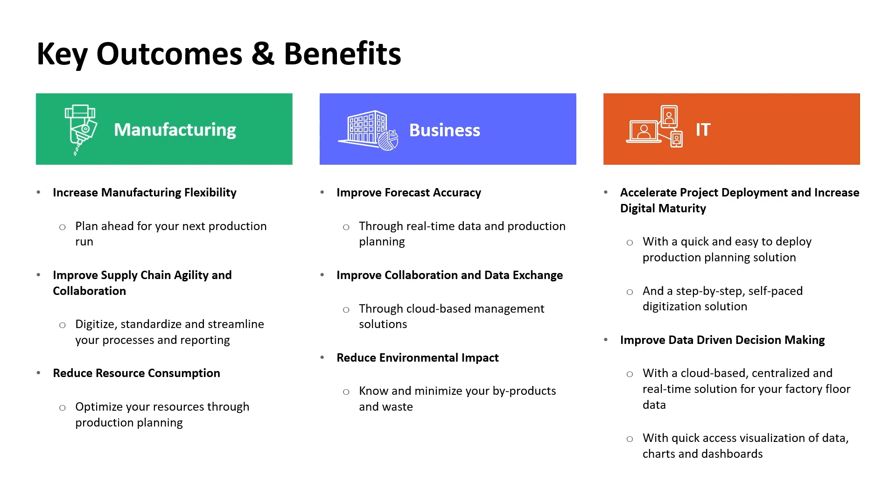So, today we talked about Fusion and ProdSmart, but these are just two of our products that we feel are on the leading edge of digital transformation and automation in manufacturing. Our whole portfolio can help you capitalize on trends, increase operational efficiency, and grow business. One I will mention that I didn't talk about explicitly today is our factory planning suite. So it is what I talked about at the beginning with how Autodesk products can help from designing things, making things, designing places, and building places, right?

We have a workflow that has amazing interoperability going from none of the products I mentioned today, but Inventor, Revit, to Autodesk Build, which is our construction cloud, where basically, starting in AutoCAD, you can lay out your factory floor in AutoCAD. You can add the assets in Inventor to create a 3D design. You can send those 3D designs to Revit, which is our architectural software, and in there you'll have a model of your building, of your factory. And then you take that model into our construction cloud. You get to see, on your iPad as you're walking on the site, where things will be, right?

And the final piece of that is a software called Navisworks, which we call 4D, which is where you as an avatar get to walk through that digital model of the space, of the machines, of your factory before it's built. So you can see if there's any collisions. For example, will a large duct interfere with a robot arm? You'll get to know that. Will my conveyors fit through the door? These are all things that have been caught early in this factory planning workflow. So I didn't even talk about it today, but that's a pretty powerful workflow that we see a lot of companies use.